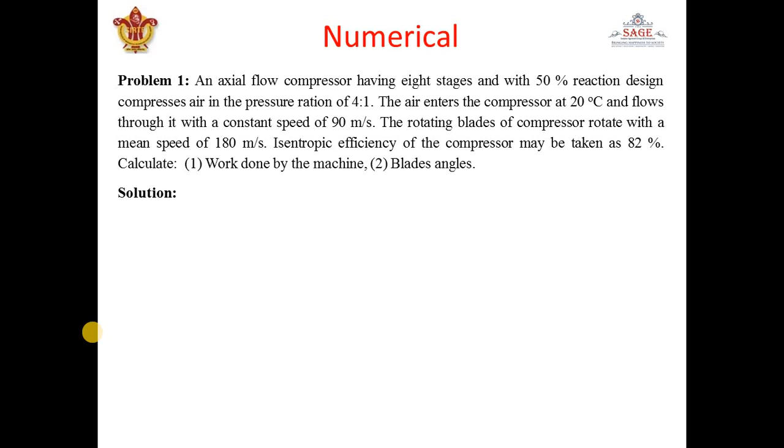...rotate with a mean speed of 180 meter per second, means what is given is blade speed CBL, and as we know that blade speed at inlet and outlet will remain constant. Isentropic efficiency is given 82%. We have to calculate work done by the machine and blade angles. Okay, so let's start with writing the given condition. This is our velocity triangle, it will remain same. Okay, it is mentioned here, so we can apply the formula very easily. Okay, so let's start with given condition.

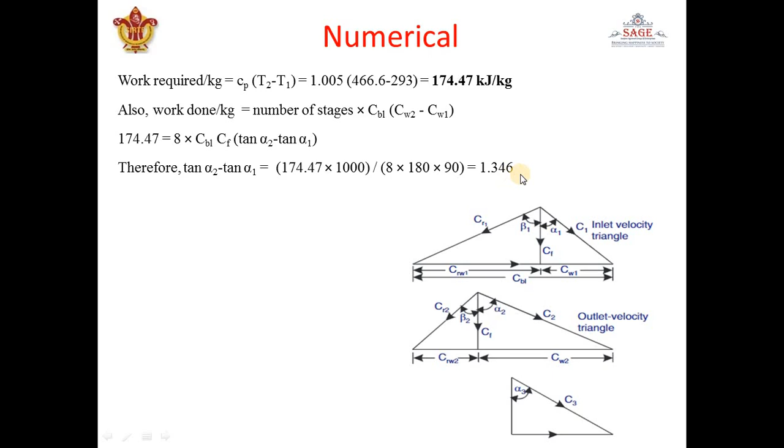Therefore, 1.346 can be written as tan alpha 2 minus tan alpha 1, which can be replaced by tan beta 1 minus tan alpha 1, because alpha 2 is equal to beta 1. So this equation can be written like this: 1.346 is equal to tan beta 1, in place of tan alpha 2, minus tan alpha 1, which will remain the same.

Now one relation that we have seen in the previous class is that tan alpha 1 plus tan beta 1 is equal to Cbl upon Cf, meaning the ratio of blade velocity to the velocity of flow. Blade velocity is given as 180, it is wrongly written here, it is 180, and Cf is 90. So we get tan alpha 1 plus tan beta 1 as 2. So we get two equations, equation 1 and equation 2. When we add these equations, tan alpha 1 will cancel. So we get 2 tan beta 1 is equal to 3.346.

After solving these two equations by adding them, we get beta 1 is equal to 59.1, and beta 1 is equal to alpha 2, so beta 1 and alpha 2 are 59.1 degrees. And when we substitute the value in either equation, we get alpha 1 and beta 2 as 18.1 degrees. So we get all the blade angles here by applying two formulas. What are those two formulas?

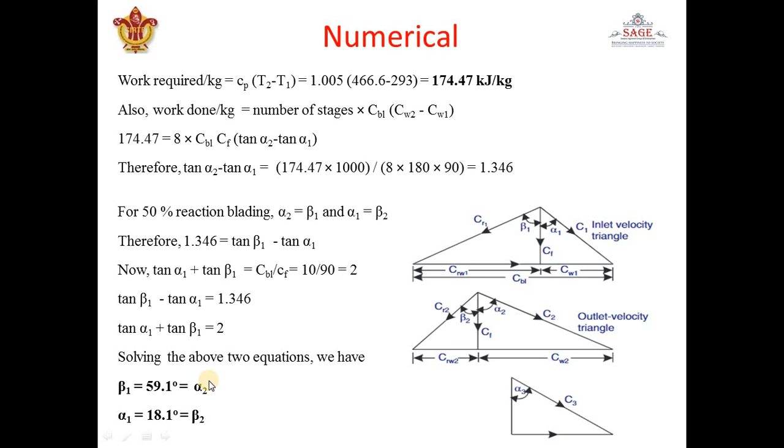Now again, one relation we know from the velocity triangle: tan alpha 1 plus tan beta 1 is equal to this plus this. So we can write Cbl by Cf. Cf is here and it will divide the numerator. So we get 2, and when we solve these two equations, we get beta 1, beta 2, alpha 1 and alpha 2. So this is a simple problem. Let's move to the next problem.

Again, in an 8-stage axial flow compressor, the number of stages is given as 8, and an overall stagnation pressure ratio of 5:1 is achieved.

Here it is not simple pressure ratio, it is overall stagnation pressure ratio, and overall isentropic efficiency is 92%. The inlet temperature and pressure are 290 Kelvin and 1 bar. Okay, T1 and P1 are given. The work is divided equally between the stages. Okay, that is true. The mean blade speed is 160, means CBL is given, and 50% reaction design is

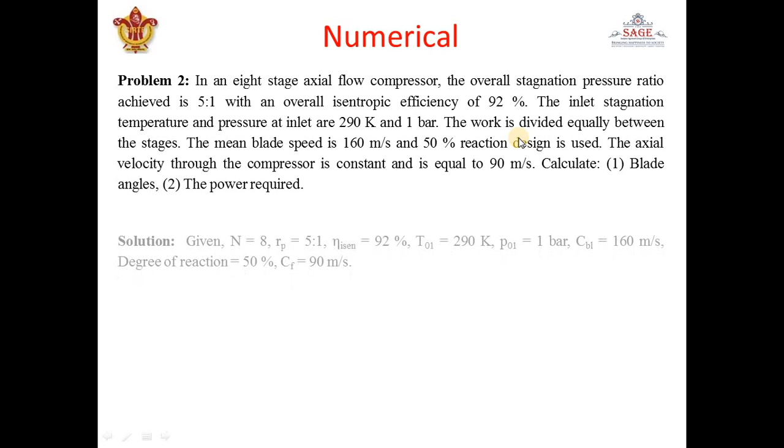given, means again the condition will be like alpha 1 is equal to beta 2 and beta 1 is equal to alpha 2. The axial velocity through the compressor is constant and equal to 90 meter per second. Again CF is given 90 meter per second, it will remain constant because we know that axial flow velocity will remain constant. Calculate the blade angles and the power required. Same thing has been asked again. Okay, so the procedure will be same. It is given like that only.

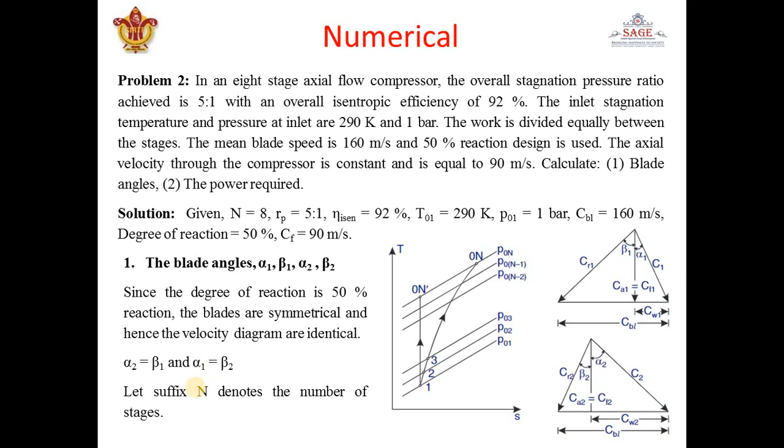Okay, this is the multi-stage. This is the figure for multi-stage compressor. 8 stages are there. It is noted by N. It can be used for any number of stages. Okay. So again blade angle. First we have to calculate blade angles for 50% reaction. The blades are symmetrical and the velocity diagrams are identical. Both the inlet and outlet diagrams are identical. So alpha 2 is equal to beta 1 and alpha 1 is equal to beta 2. Okay. So similar figure will be used.

So isentropic efficiency. With isentropic compression, what we can write for complete 8 stages: T0n dash is equal to T01 into P0n by P01 to the power gamma minus 1 by gamma. We have applied formula, T01 here in denominator. I am directly writing this formula. T01 is given 290 Kelvin. Stagnation pressure ratio is given 5, to the power 1.4 minus 1 upon 1.4, it is 459.3 Kelvin. Okay, so we get T0n dash. Now from isentropic efficiency we can calculate this temperature.

Okay, now with isentropic efficiency, that is isentropic heat rise upon actual heat rise, means temperature rise. So by using that formula we can get this temperature T0n. See, isentropic efficiency is equal to isentropic temperature rise upon actual temperature rise. This one is actual temperature rise and this one is isentropic temperature rise. Substituting the values that we know, we get T0n. It is 474 Kelvin. Okay, now what we have to do?

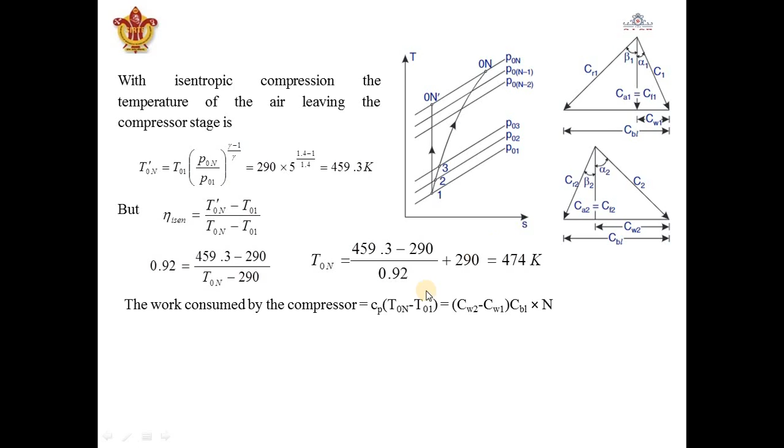Again we have to do the same thing. Work consumed will be equated, obtained from velocity diagram and obtained from TS plot. These two works are equated. N denotes number of stages. It is given 8 here. Again this will be replaced by tan formula, tan alpha 2 minus tan alpha 1. So from here again we get similar equation, tan alpha 2 minus tan alpha 1. This is very much similar to the problem that we have solved, 1.605.

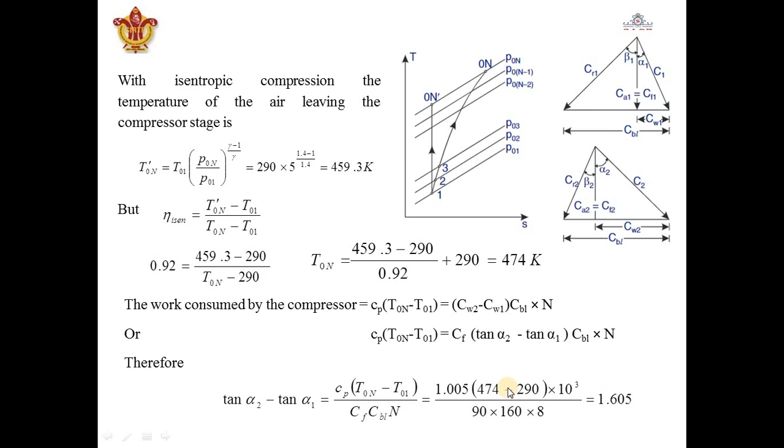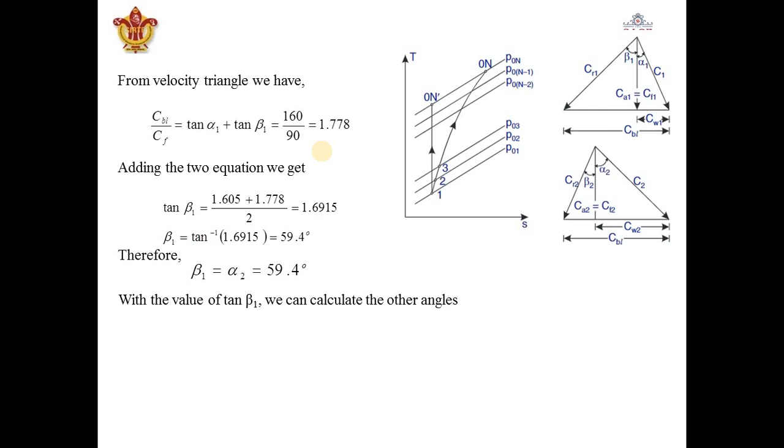From velocity triangle we know CBL by CF is equal to tan alpha 1 plus tan beta 1. Then again we get two equations in terms of alpha 1 and beta 1. When we solve these two equations, we get beta 1 is equal to 59.4 and beta 1 is equal to alpha 2, because the compressor is 50% reaction blading. With this value of beta 1, substituting this in this equation, we get alpha 1 is equal to 4.94, and alpha 1 will be equal to beta 2, which is again 4.94. So all the blade angles are calculated.

Now what we have to do? Power calculation. So power will be m Cp (T0n minus T01). For m, it is given per kg, Cp 1.005, T0n minus T01, that is actual temperature rise, 474 minus 290, we get power required by the compressor.

So both the problems are almost similar. The values are different. I have given this problem because both problems are already asked in previous year question papers. So the problem will be simple for axial flow compressor. There are more chances that a problem from centrifugal compressor will come, but this is also very important. So practice this problem. I will send tutorial to you. You can also practice some other problems as well for this complete unit.